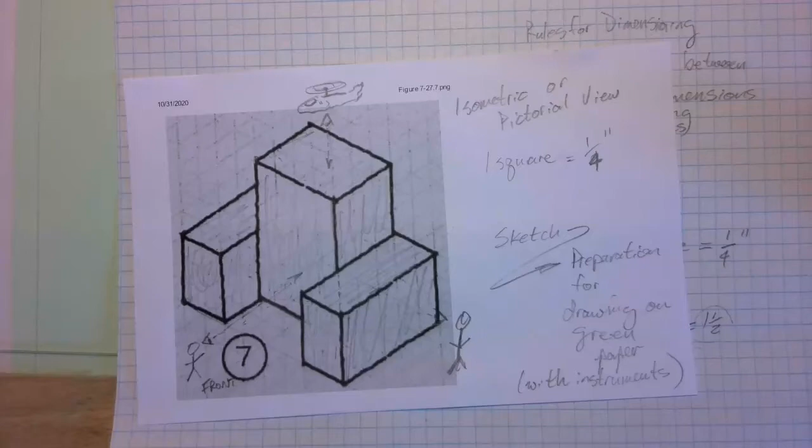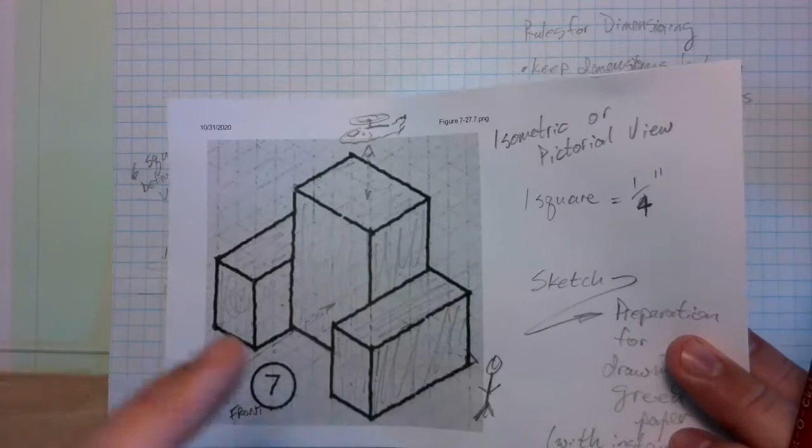All right folks, this video is going to show how we're going to create this drawing. This sketch here was created from this isometric view, this pictorial view. We know that one of these squares equals 1/4 of an inch, and that has translated over to this.

So I'm not going to show this too much anymore. There are other videos that can show you the details of how this sketch was created from this pictorial drawing, but that is not the focus of this video.

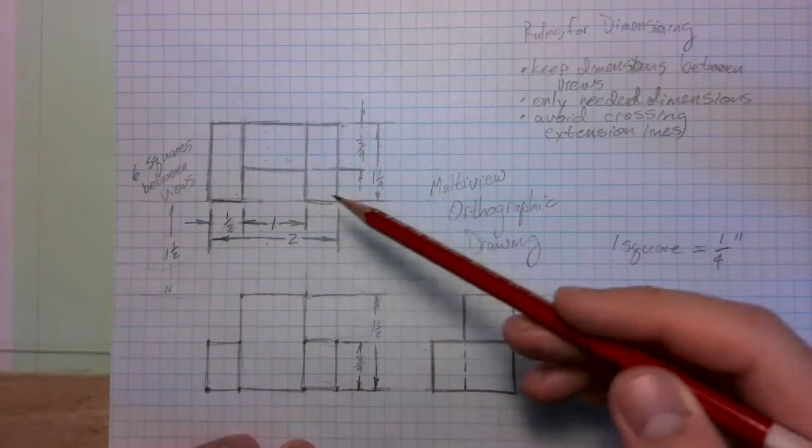What we're going to do now is translate this drawing, which already has dimensions and all the object lines, onto a sheet of green paper, and we're going to have it centered neatly in the middle with our views visible.

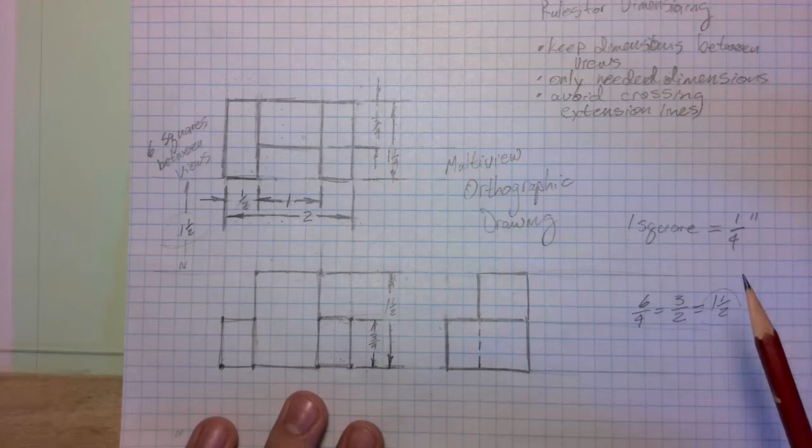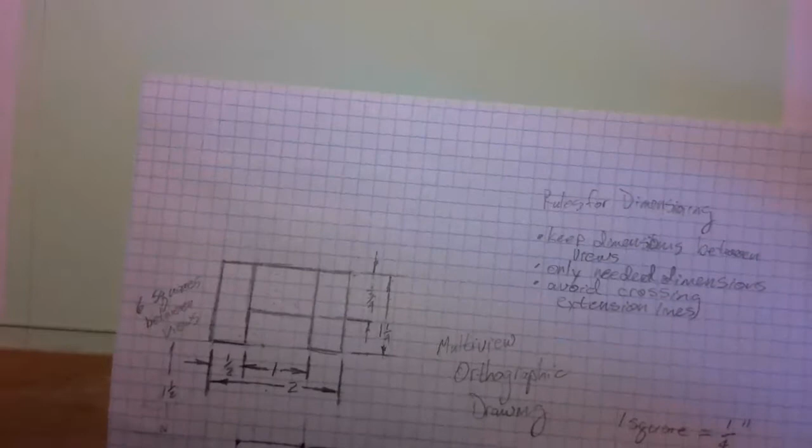What we need to do first is we already found the center of this page here. It is a bit faint, but it is right here. I found that with the diagonals, as is traditional. Let me adjust the exposure, that might make this a bit better.

We need to decide how we're going to center all these views on the page. We're not just centering one anymore. We're centering the entire set of views, which is why a sketch is so important.

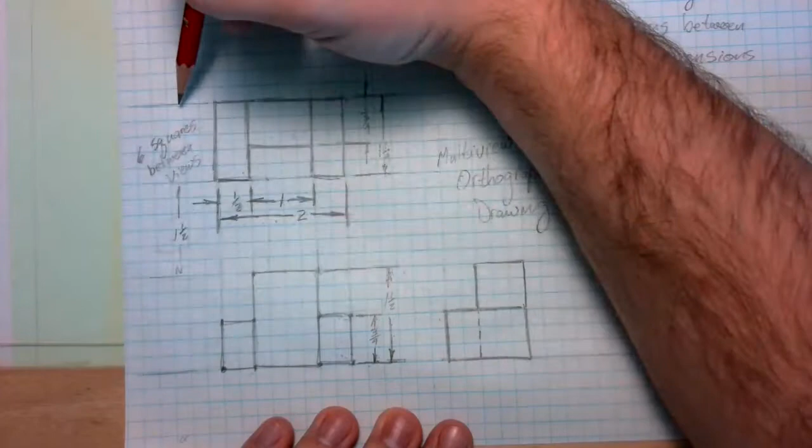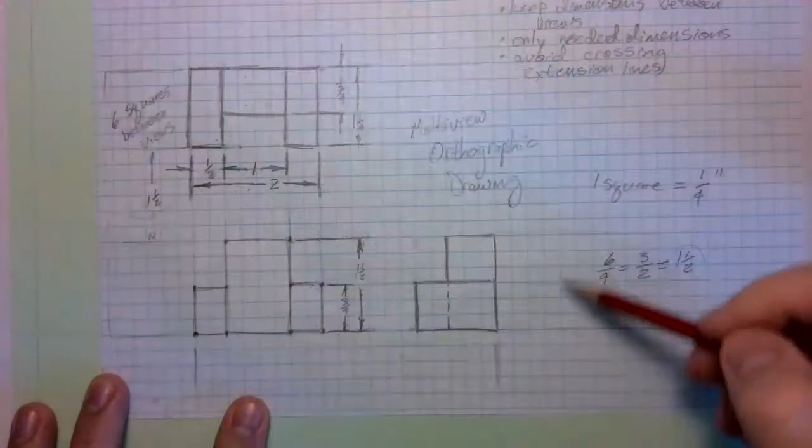Because what we can do now is look and say, how tall is it? How big is it from here to here? These are not dimensions that we'll actually put on the page, just dimensions we're going to take a look at to show. So I want to know how far it is from the top part down to the bottom, and how far it is from here to here, because this entire set of 3 views is what we're going to center on the page.

So from here to here, these are just some quick sketchy dimensions. I could count the squares, but at this point, this is the real size we want. So I'm just going to measure, and look at that, it comes out to about 4 3/4. So this is 4 3/4.

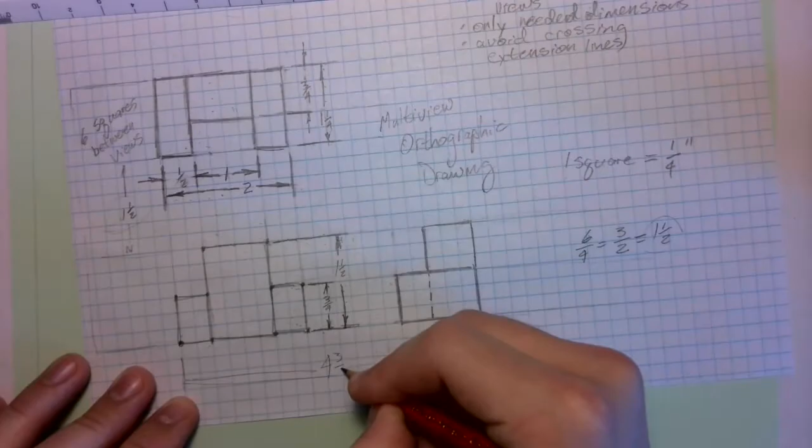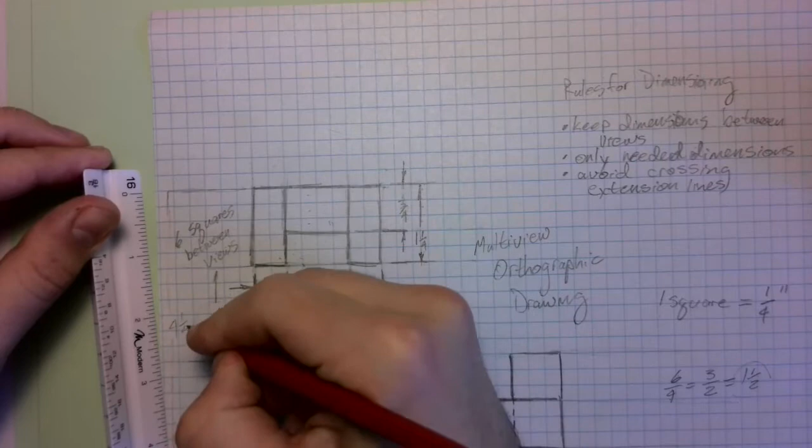And here we've got a total height for our multiple views at 4 1/4. And now, as is customary, we can write this up here: height equals 4 1/4, width equals 4 3/4.

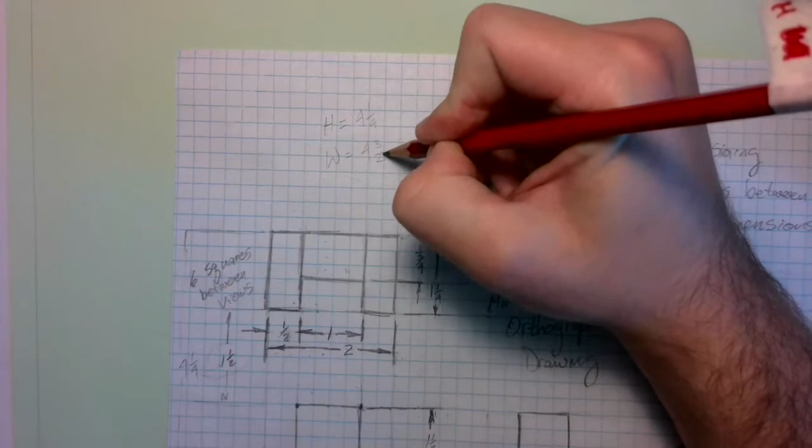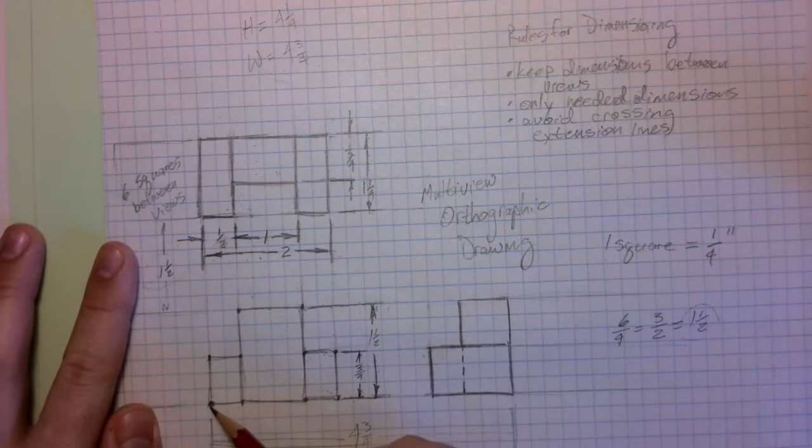As is customary, we're just going to chop these in half, and that's how we'll know how far to go out on either side to get, for instance, the lower left corner of our front view. So this is the real point we're shooting for.

Our center is going to be somewhere in here. We're going to find this distance and this distance so that we can start at the right spot on our green sheet of paper. So to cut these in half, you can use a calculator or any other method you want, but this comes out to 2 1/8.

Well, so that's not equal, that's divided by 2. We get it down into this — this is going to come out to 2 3/8. If we remember, we double the bottom of a fraction, we get the half amount. So this is our sort of coordinates from the center.

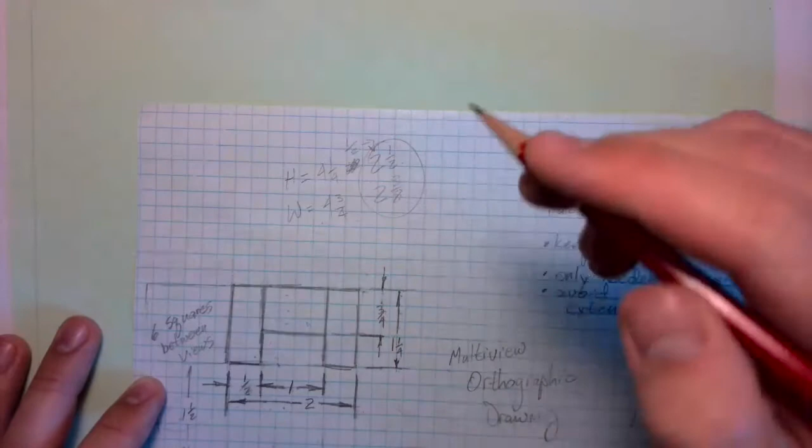If our center point of the page here is 0, 0, we're going to go negative 2 3/8 for the width, and then negative 2 1/8, because we're trying to get a point down there in the lower left corner.

So I'm going to just measure that out. We said we go over 2 3/8. I'm going to just start on the 5 here because it's easier — 1, 2 inches and 3/8 inch — and then let's get a T-square out here. I'm going to make a super light mark just to help me out there. Okay, and then we're going to come down and get some vertical mark on here.

There we go. Super light, so I can lay my scale on that, and we're going to measure down 2 1/8. Right there. So this point right here that I just found—I know I'm keeping my line super light, but you can see the general marks I'm making here.

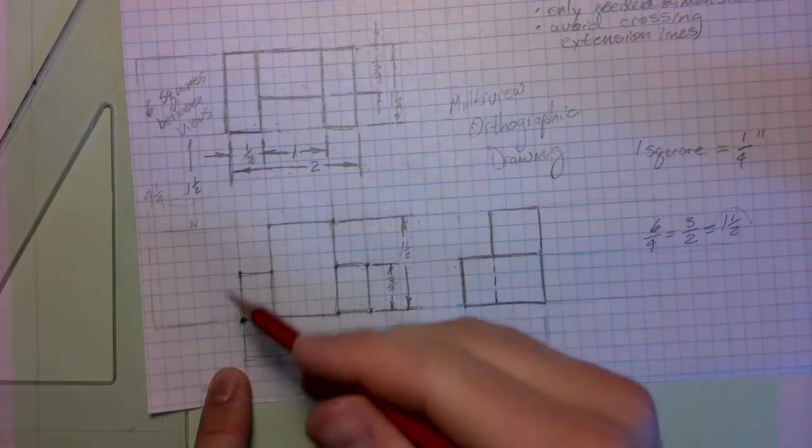This point right here, I'll make a little darker so we can see it—that's going to be this corner of the object. Now I can just start drawing this front view very simply, since I have all the sizes right here. This part should be pretty comfortable for everyone. Probably the biggest challenge is just finding that corner, which comes from finding the overall height and width, and then figuring out how to get down to that lower left corner from the center of the object.

So I'm going to just go from here. We know the width of this—let's see, we measured it, we have dimensions—it's 2 inches wide. So I'll make a mark coming straight out. Let's see, 2 inches, so that's going to be an edge right there. Let's draw that line.

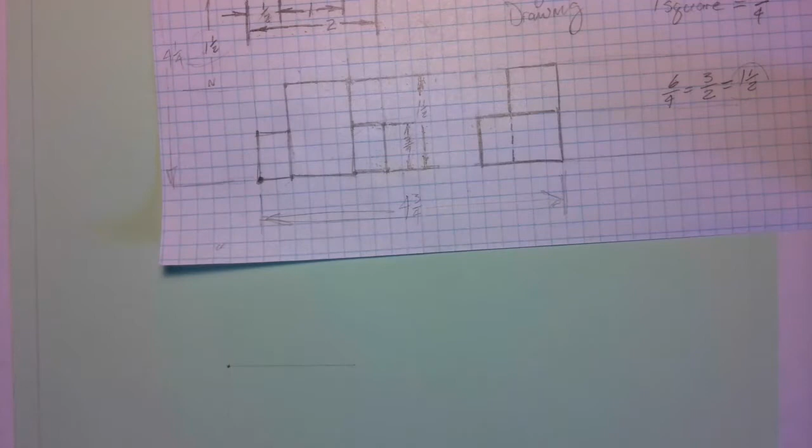Okay, and I'm going to come up 3/4 of an inch on either side. You can really go about this part any way you like. In fact, I'm going to skip ahead in this video to a point where this front view is already drawn, which will help us a bit.

All right, so my front view is now complete. As is customary in these videos, I've made the lines darker than you probably should make them. You should keep them as light as possible until the very end when you darken things in. I'm just doing it darker so you can see what my lines look like better over the camera.

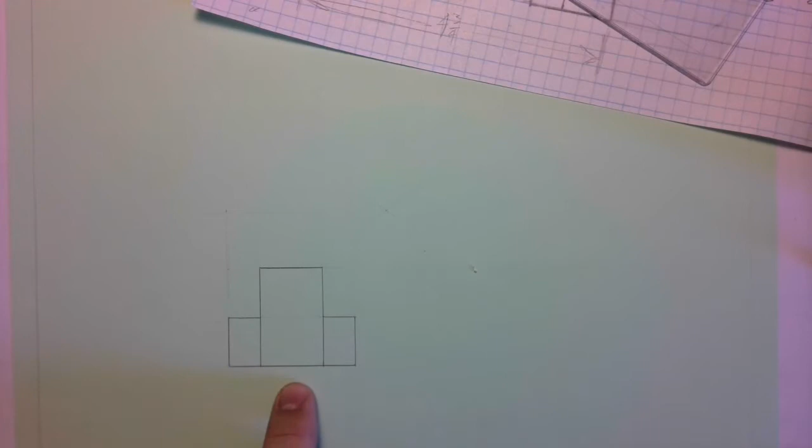I'm just cleaning up this corner now from the point we started at, because it's ugly and it's bugging me. You can always clean up with your eraser shield as you go, or later. But again, you want light lines—about as light as these here, not as dark as this. I'm just doing that for the sake of the demonstration. So we now have this front view done.

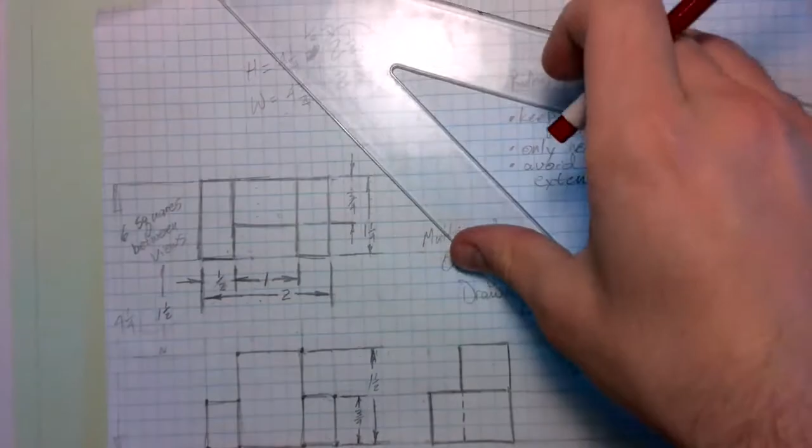Beautiful. What we need to do now is create that top view. If you remember from when we were sketching, we projected lines up by just freehanding them. Well, now we don't need to do that anymore—we have our drafting instruments, and we can draw vertical lines.

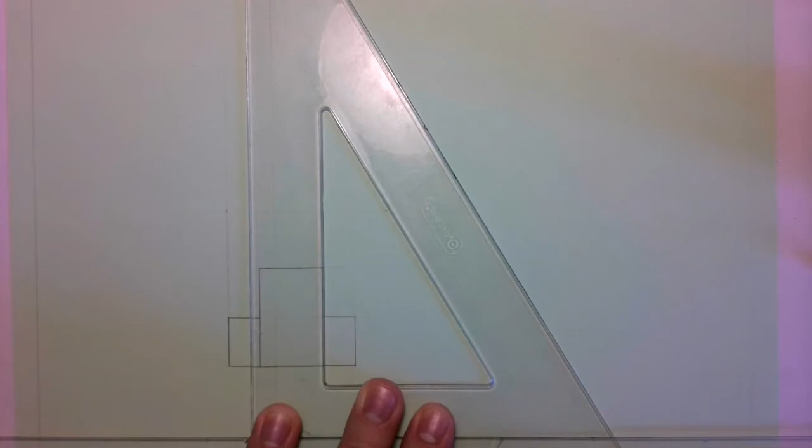So I'm going to get through here and project up these top view lines just by taking my triangle against my T-square. I'm just going to very lightly project these lines up—you can see that faintly, that's there. I'm projecting up each of these edges, and this really helps if you watch these videos in the highest definition you have available.

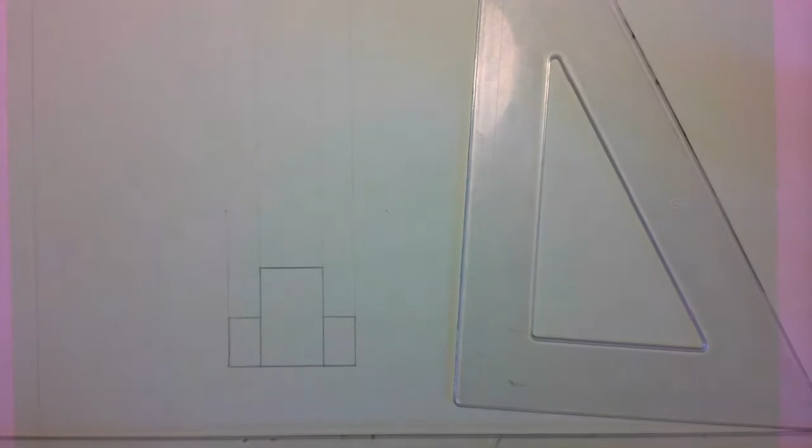I'm sort of overdoing the height because I can always erase, since these are super light construction lines—I'll erase them later, but that gives me the height. Now, if you recall, we have a distance between the views of 1.5 inches—that's the minimum room we want to leave. We can leave more, but for the sake of this first drawing, we're going to leave exactly that amount.

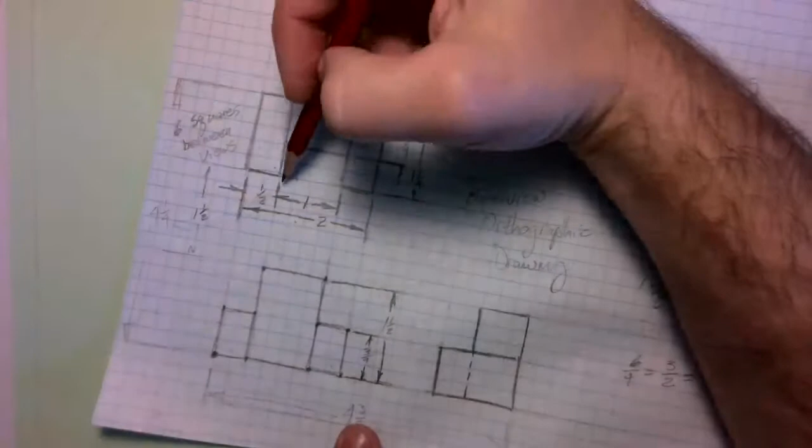And look at this—I've got lines I can measure up on. So when I say 1.5 inches, I mean from the highest object line here. I'm going to put this on the 1.5 inch mark, lay it along one of my construction lines, and that spot right there indicates the very front of this whole drawing. So it's probably really that point right there that I just found.

Yep, if we look—be careful, I've got a little horizontal line here, and you don't want to get confused. You may want to erase construction lines you used earlier just to make sure you don't get confused. So again, I've now found right here, this little faint dot, the starting point of the front of my object.

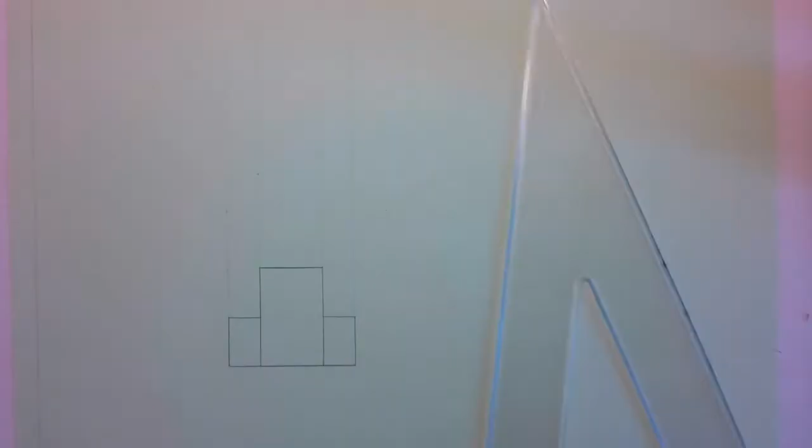So if I look here, I'm not going to draw construction lines all the way across. I'm going to eyeball in this line and this line, and then I can measure up and find these other lengths here. So first I'm going to eyeball—uh-oh, I've moved my camera.

There we go. First I'm going to eyeball in this front little edge here. And we know that that lines right up with this, so I'm not moving my T-square. I'm just adding those two lines.

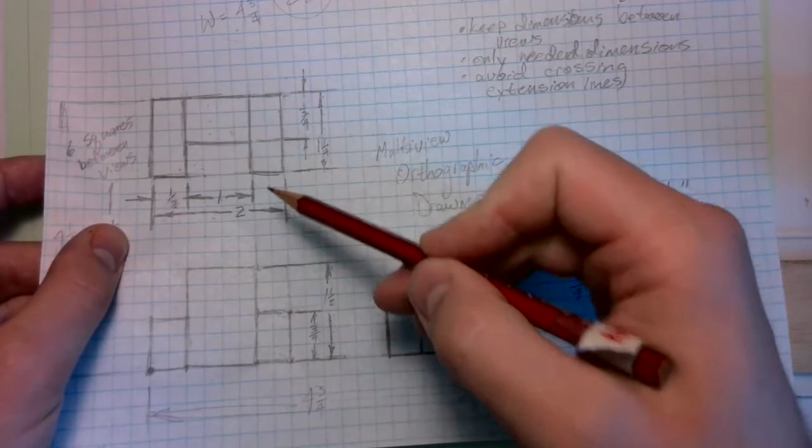Now I'm going to find this line. We can count that is 2 squares back from the front, so that is 2/4 of an inch, also known as 1/2 of an inch. I'm going to lay this on here, go 1/2 inch back, make a little mark that I'm going to use my T-square on to fill in the blanks.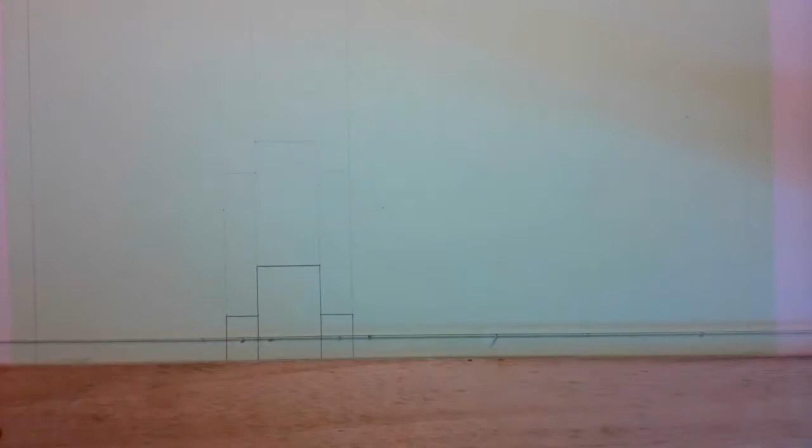And from there, I can go 1, 2, 3 back, and that is going to give me the very back edge of the object. So really, I could have done this in one mark.

Theoretically it's more accurate if you don't keep moving your scale, but when you're learning, sometimes it can be okay to keep lifting up your scale and moving it around like that. As you start to feel more comfortable with these techniques, you're going to start noticing how you can create all the lines you need with the fewest possible movements of your instruments. That comes with time.

And now look at that - we have our top view.

That's pretty light, so I'm going to darken that in for a moment and we'll come back and you'll see that. Again, you don't want to darken as you go - you want to wait till the end, but I'm doing it so you can see better. Okay, so now I've darkened this in a bit so it's a little clearer to see.

Now we're going to do the same thing. We're going to generate this right side here. Same deal as with the top - we're going to project those edges off there.

This is as simple as - let me find a harder pencil, I'm going to use 4H, that's the hardest, good for construction lines. Project off, do it a little bit of overkill where it maybe goes too far, so that I have lots of room to work later.

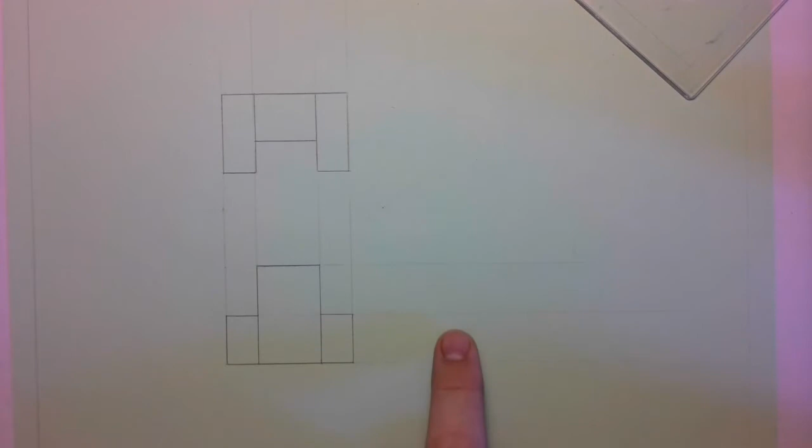Projecting, so I have these very faint lines here. Should still be fairly visible though - no good way to adjust the lighting. So those represent our edges here, and that's going to give us our 3 lines there, but now we need to find those depth lines.

Now this is where there are a lot of different techniques. I'm going to show you what I think the easiest way is for stealing the depths from up here, and that is using a compass, okay?

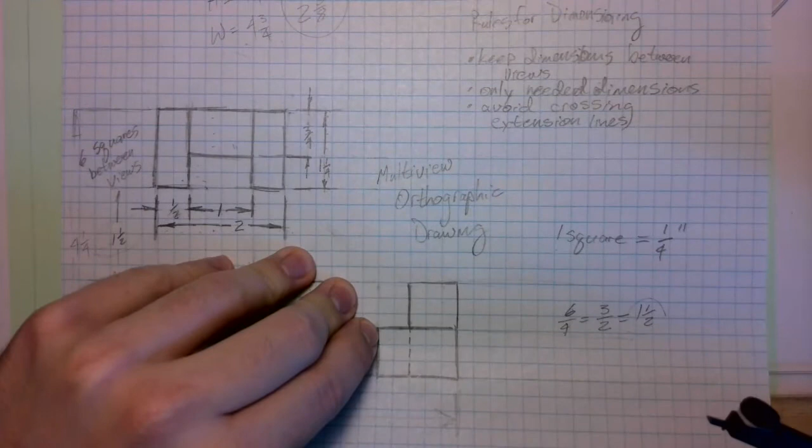This is as simple as - if you notice here, say I want to get the distance from here to here so that I can find that line. We know we're going to start with this line, 1.5 inches away, as we've talked about the space between the views. But I need to get the distance from this point right here up to this point, and then I need to get the distance also to the back.

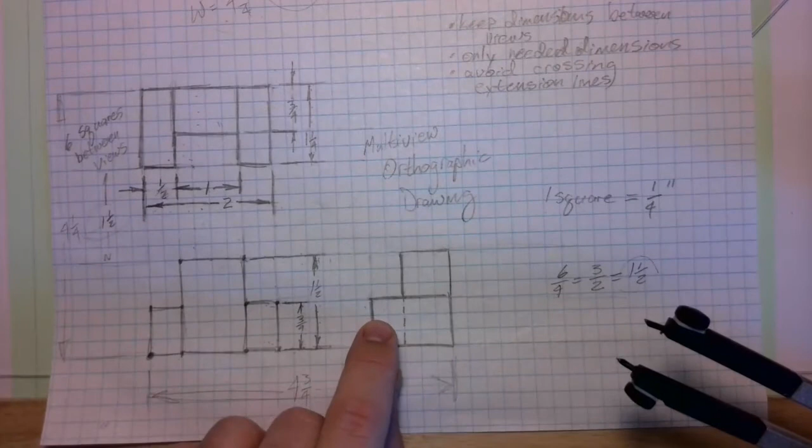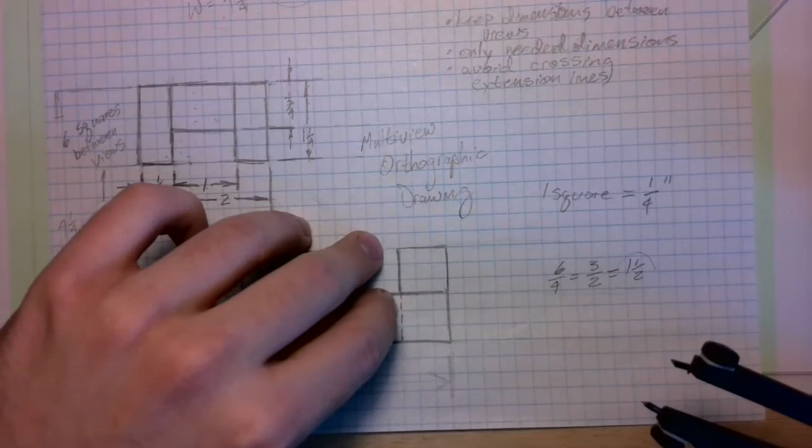Well, I can steal those from my top view here because they're the same. The distance from here to here is really the same as the distance from here to here. Since this was the front surface, this was this surface right here, and so is that, we know that this dotted line, this hidden line, and this part up here is this whole front surface, which is the same as that line. So the distance from here to here is equal to the distance from here to here.

And I can take advantage of that by sneaking in here with my compass, moving it till it's the right size, wiggling it around a little bit, and then I'll be able to bring it down here and look at that - they're exactly the same.

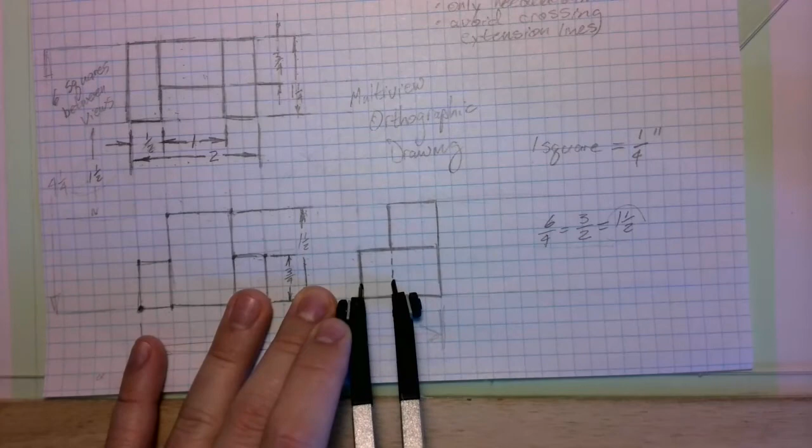So let's do that over here on the drawing. I'm going to put this right on one of these spots. I'm going to close my compass or open it as needed until it's just on that line right there. And then I'm going to come down here and - oh, I forgot to draw my front line, so let's sneak in there real quick. We'll set that aside, we'll save that, and let's add that in there.

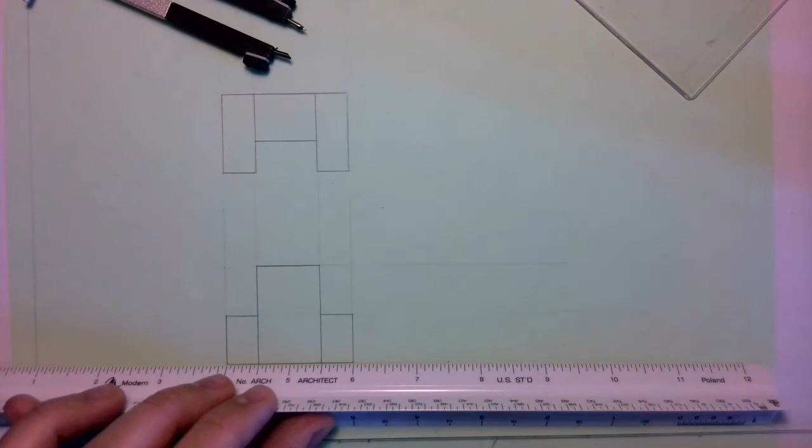So I said 1.5 inches between the views. I'm just going to lay my scale right on here and mark 1.5 inches. So there we go—this little spot right there is going to be this front part.

Now I can grab my compass again, which I know that was this surface here that I pulled from, and I'm just going to lay this on. I'm going to make the tiniest mark so I can see how far back that went, and then add that line in.

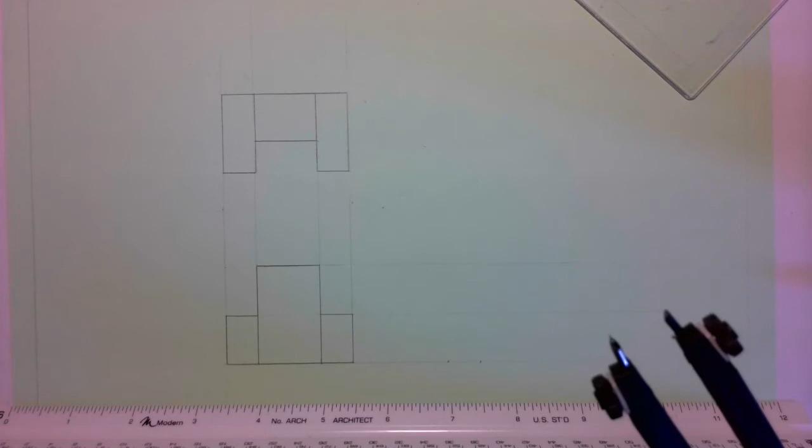You can do this all in one pop—transfer all the marks at once, or flip-flop back and forth and add in your vertical lines now. I'll just add it in for some clarity.

So we had the front part of this, which goes from here to here. If we look at our sketch—see how we keep consulting our sketch—this is why it's so critical to have the sketch first. So we'll have that distance there.

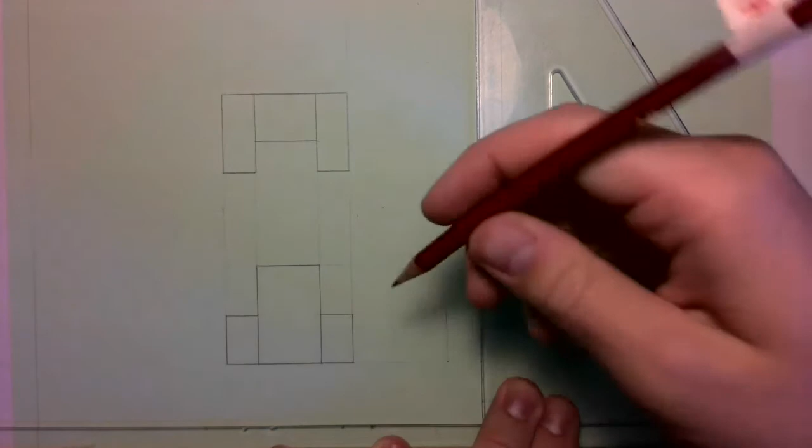And then we just found this line right here. So I'm going to slide my vertical edge over, and that really goes this whole height. We're going to put the dashes in later with our eraser shield.

Now I need to find the distance from here to here. Well, we just stole this distance from here to here. Now I'm going to steal the distance from here to here.

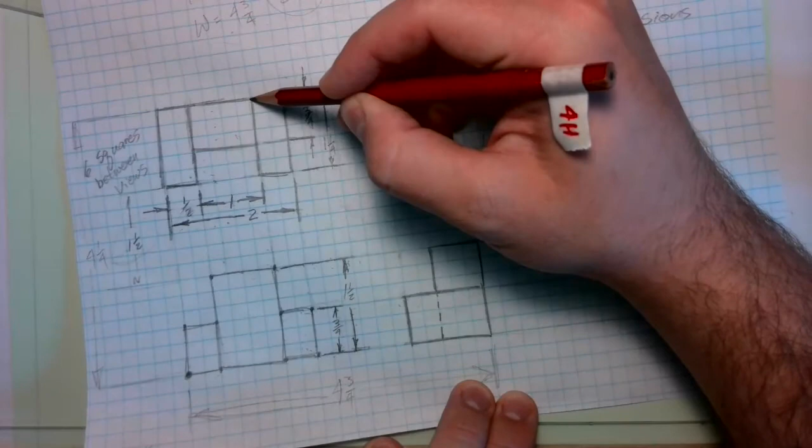Same deal—get in here with our compass. I'm going to put a point on the starting point, open this up, and transfer that distance. Okay, that looks good. We'll do it up here at the top because we know we have that edge.

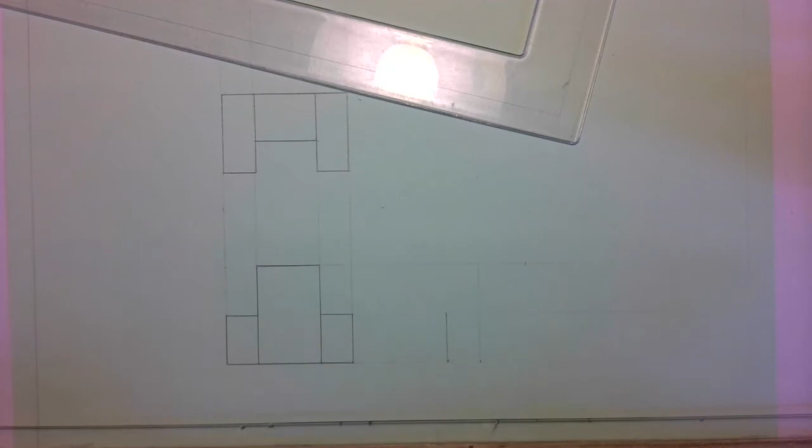And right there, that little mark I just made is going to be the back part of this drawing. Bam. Okay, we have that whole height in there.

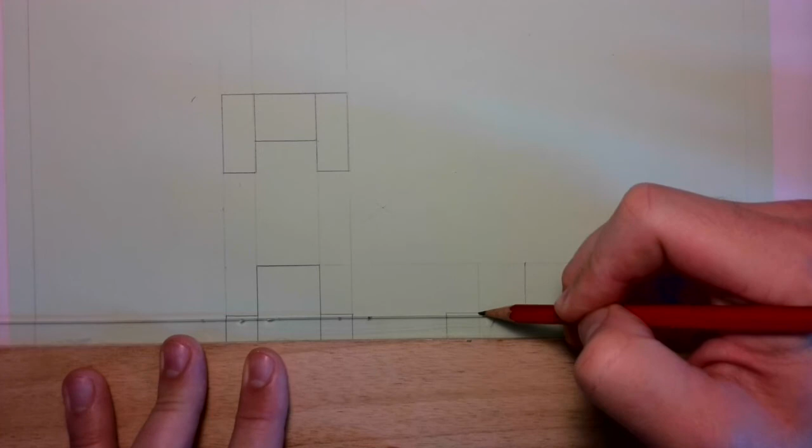So now I'm just going to, again, darken this in so we can come in here. I'm darkening this—you should wait until you're totally done and darken last, but I'm doing it for the sake of clarity. Let's see, this comes all the way back.

This is going to go here. This line is going to be dark until we get to the hidden part of it. And let me show you how you can create a hidden line.

So I'm going to continue this line, but keeping it pretty thin. I've shown this a couple times in class—what you can do is get in here with your eraser shield and kind of line it up.

Let's see, there's my top line and my bottom line is down here. I'm going to line it up so that the dashes touch—it's masking the parts so there's dashes touching each top and bottom edge.

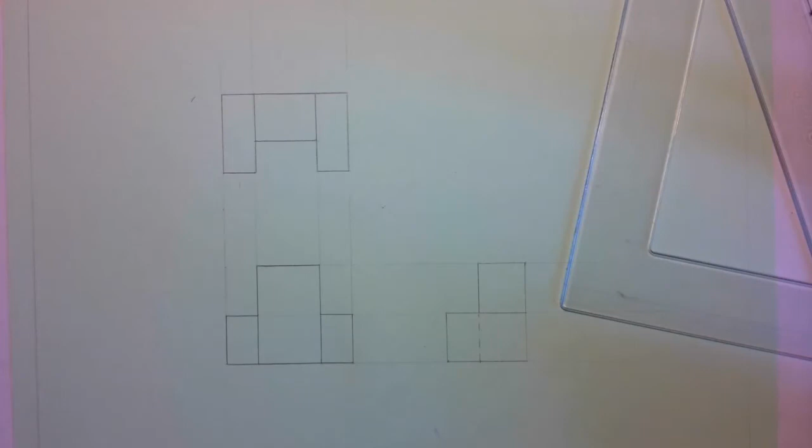For this one, it looks like about 3 holes, and then I just scrub the eraser over those holes. I don't want to erase anything else except these spots, and I've got to hold this down real good, but when I take it away, we're left with a pretty decent dash line.

You can always come in here—it looks like the top of that line got a little accidental erasure, so I'm going to just darken that a tiny bit. So, pretty good, decent spacing between the lines.

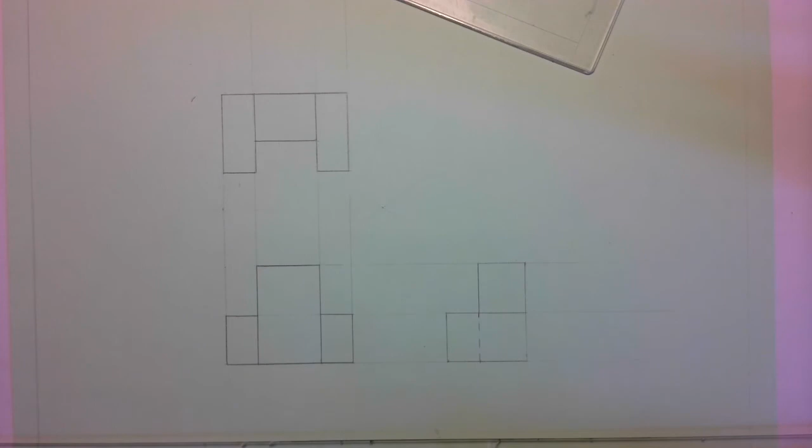And now we have our front, top, and right side views. So it would be at this point that I would encourage all of you to darken in. Up until this point, you should have kept everything light.

I was keeping things dark so it was a little clear how you could see it, but those are the key ways: you start with the front view, project up, take your distances referring to the sketch you made, and then steal

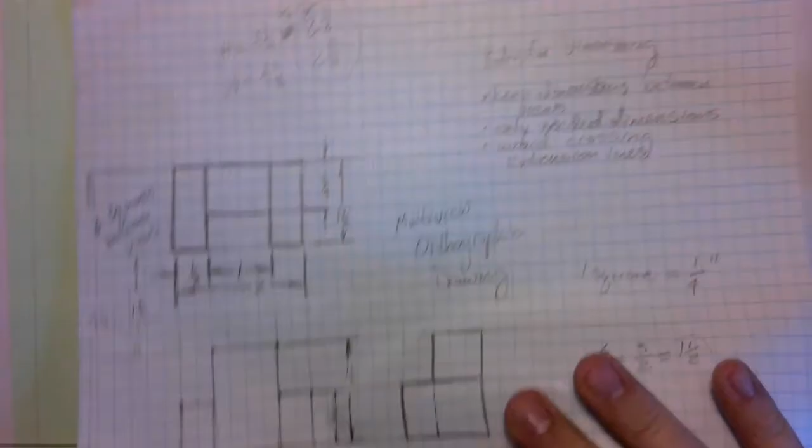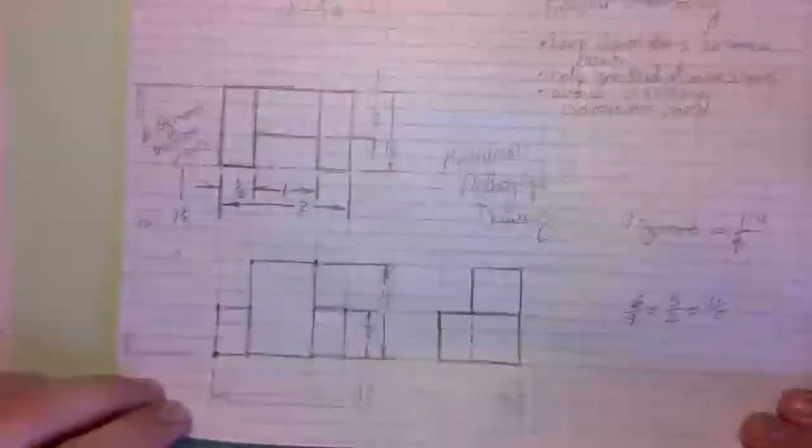those distances from the top view to generate your right side view so that you get something that looks like this. And you can see that was pretty accurate to our sketch that we did on the graph paper, or on the white paper laid over top of the graph paper.

But that is all that there is for this video. So I hope that this helps.